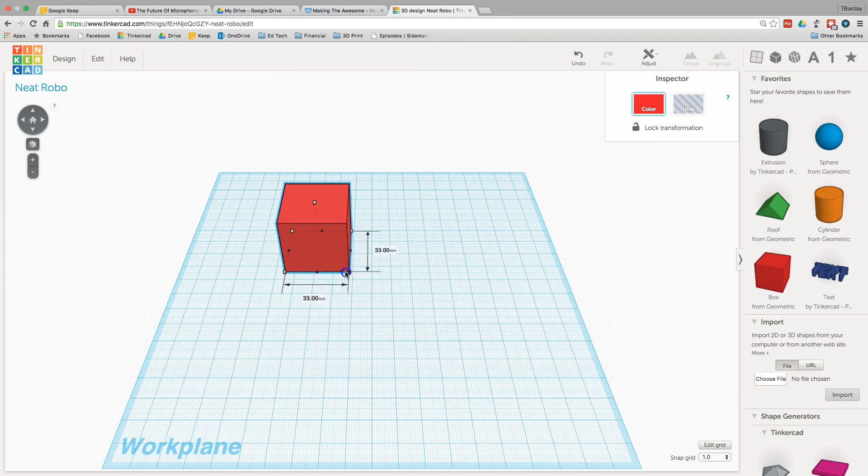To resize this box, we use a number of handles, the white or black squares around the box. If we grab one of the corners, we can resize it in two different dimensions. If we want to keep the box in proportion, we hold down the Shift key and drag it. So that's in proportion, and that's without the Shift key, out of proportion.

If we want to make it taller, we grab the white box on top. This can be confusing with all the other handles, so it can be difficult to find. There's also a black triangle on top, easy to grab by mistake, but that will actually move this off of the platform.

I'm going to rotate this a little bit so you can see that. You can move the vertical axis, moving the whole piece using this black arrow.

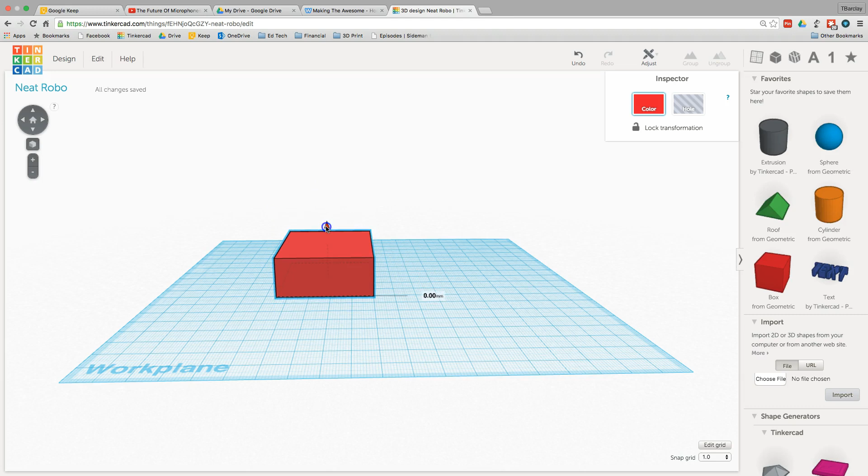There are three more handles which are sometimes a little more difficult to see, the curved handles around the corners. If you grab one of these, you can rotate it. If I move the mouse inside this little blue circle, I'll rotate in chunks; if I move it outside, I'll rotate in individual degrees. So depending on what you want to do, you'll want to know where your mouse cursor is.

There are three of these handles, and on this view we can only see a couple. To see our object from another view, we'll click somewhere in the background with the right mouse button and rotate. Now we can change our view of the whole work plane, and you can see all three of these handles.

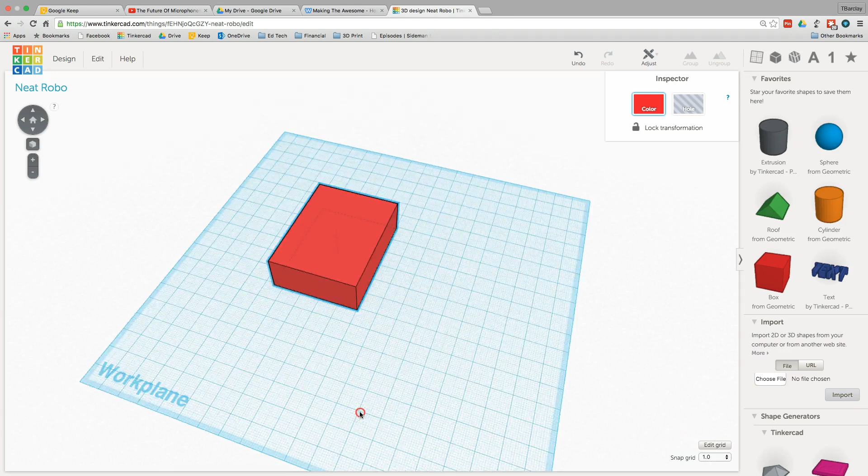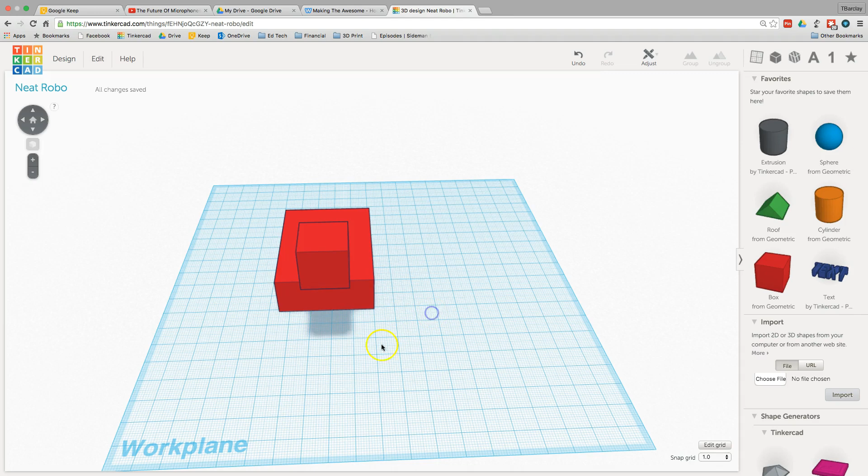Changing your view like this is one of the most critical things you can get the hang of doing. It takes a bit of getting used to navigating in 3 dimensions. The most common error I see when people bring me designs to print is they have two pieces that look attached from one view, but when you move to another view, they're very far apart. So you want to be in the habit of getting views from all over your screen all the time.

You can also zoom in on what you've created, or zoom out, using the mouse wheel. You can also use the trackpad for all of these things, though it's a little more difficult. I highly recommend a mouse, but it can be done.

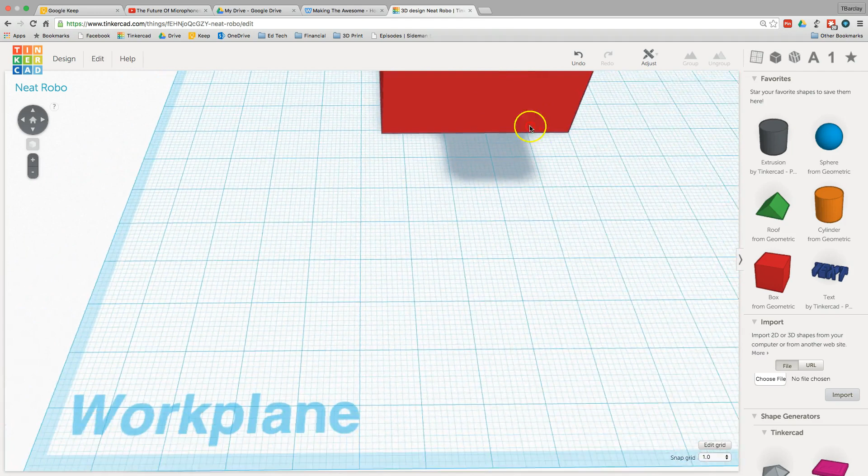If you hold down the Shift key while you right-click, you can move the work plane around. This is particularly handy when you're really zoomed in on something. If I'm seeing one corner and want to come over to see the other corner, this is a lot easier than zooming out, changing your view, and then trying to zoom back in.

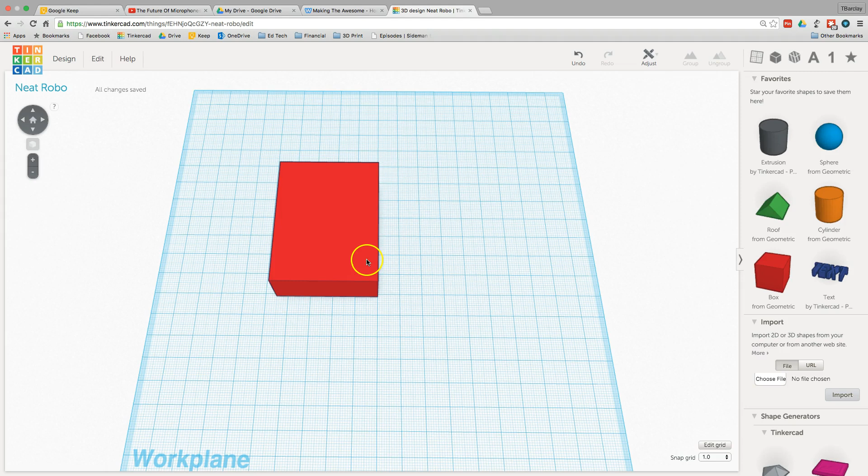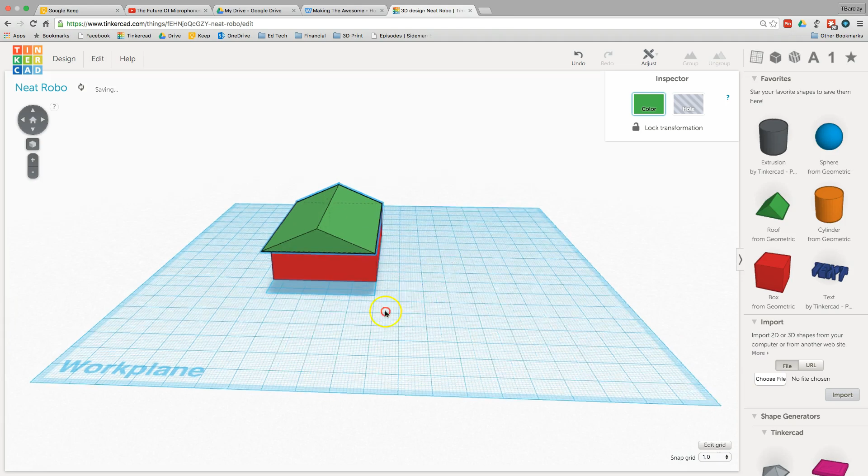Alright, so we've got a piece here, and if I want to add another piece to it, let's say this is a house plan and I'm going to make a roof. So I grab a roof piece and resize it to something similar.

So I have these pieces together, and I want to group them so I can treat them as one piece from now on. I can select both pieces either by dragging a square around both, or by clicking one piece, holding Shift, and clicking another. Once I've got all the pieces I want to group selected, I go up to Group in the top right corner, click it, and now they're grouped.

You'll notice the color changes as well. When you group something, it takes one of those colors and makes everything that color, to let you know. You can change that if you want to keep the colors by clicking your color indicator here. You can change the color of everything, or if you click the checkbox for multicolor, it will keep the original colors even after you group them.

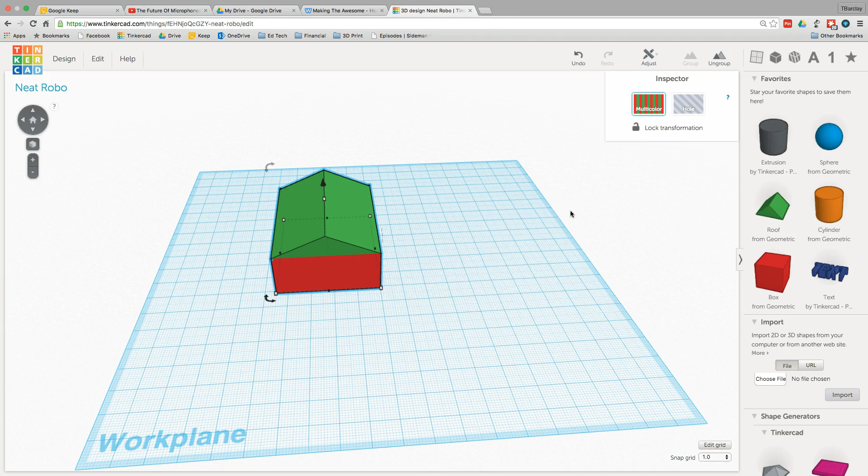If you 3D print this later, this won't affect the color it prints in, but it can be really handy for keeping track of what's what. There's another button right next to the colors called Hole, which we use to subtract a shape.

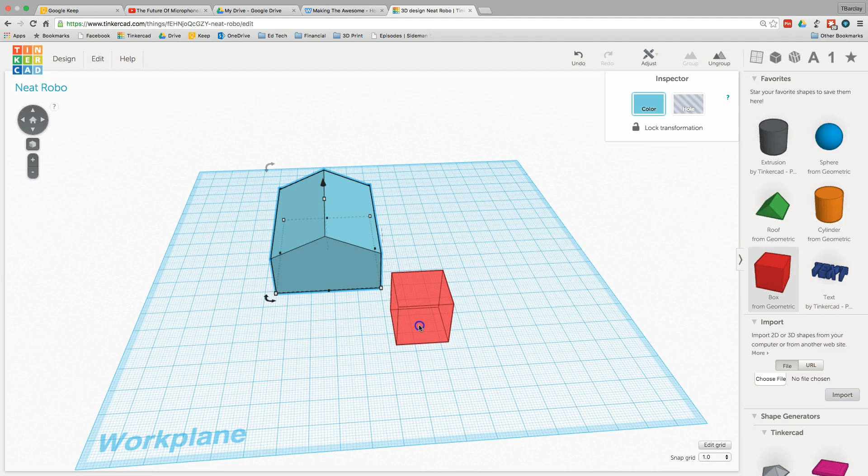Let's say I've got this house and I want to cut a door into it. So I'll bring in a shape and make it roughly door shaped.

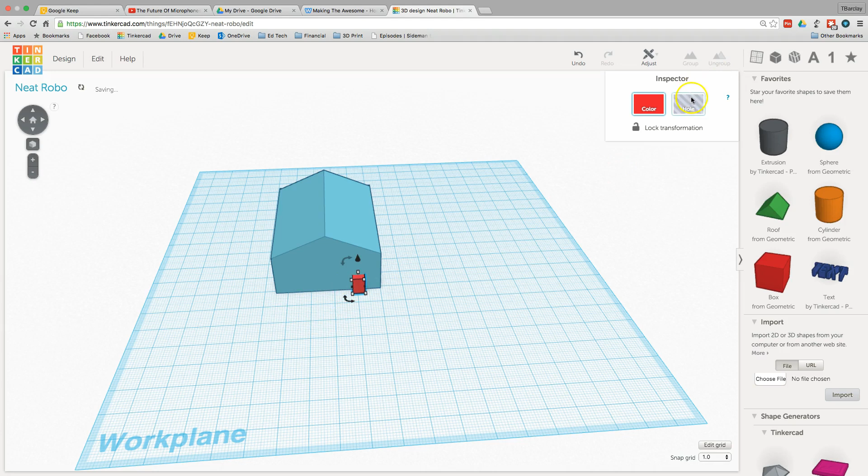If I want to remove this shape from the larger shape, I put this wherever I want it to be. I make it a hole with this button in the top right, which turns it transparent. Now it's not actually going to cut anything yet. Before it cuts that piece out, I have to group these pieces together. Once I select everything and hit group, now I have that piece cut out.

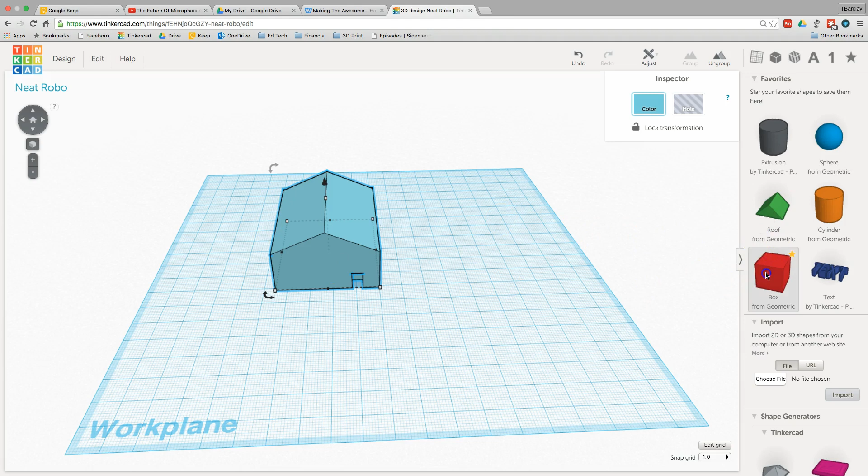This is a really powerful way of doing things. So for example, let's get rid of this. Let's say I'm making a little box here, and I would like to round this edge. The way I do this is I make a cutting tool. Let's get another box and change the color to make it a little less confusing.

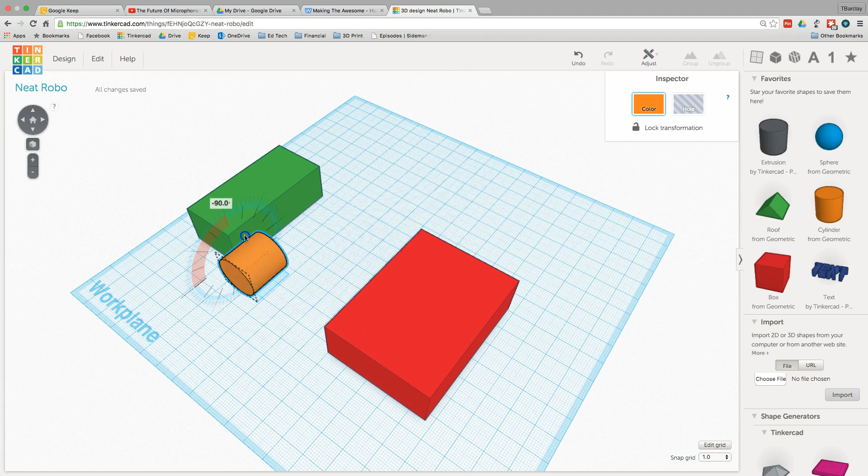And I can cut a shape out of this box that I will want this curve to be. Bear with me for just a second. It's not very difficult to do, but conceptually it's a little bit challenging sometimes. So I'm going to cut the corner that I want out of this box. I'm going to make this cylinder into a hole, group these two together.

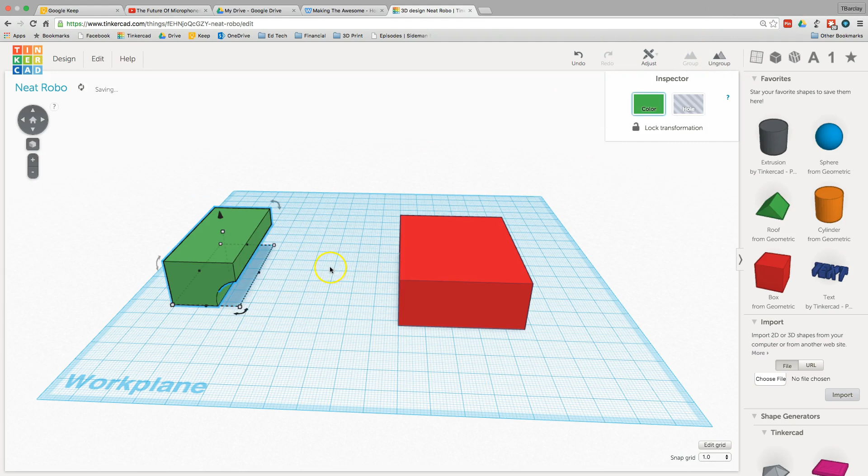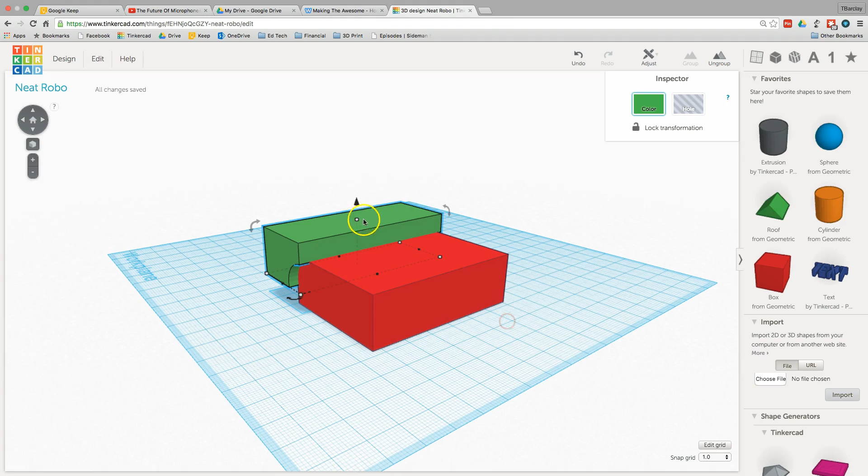And so now I've got what I think of as a cutting tool. I've got the corner that I want in reverse, and I can move it over to here. And I'm going to cut this shape out of this box by making this whole shape that I've created into a hole and then grouping these together. That's pretty well lined up. If I were making a finished product, I might spend a little more time on it. But you can make some really complicated shapes with just these couple tools, the simple shapes, adding and subtracting them.

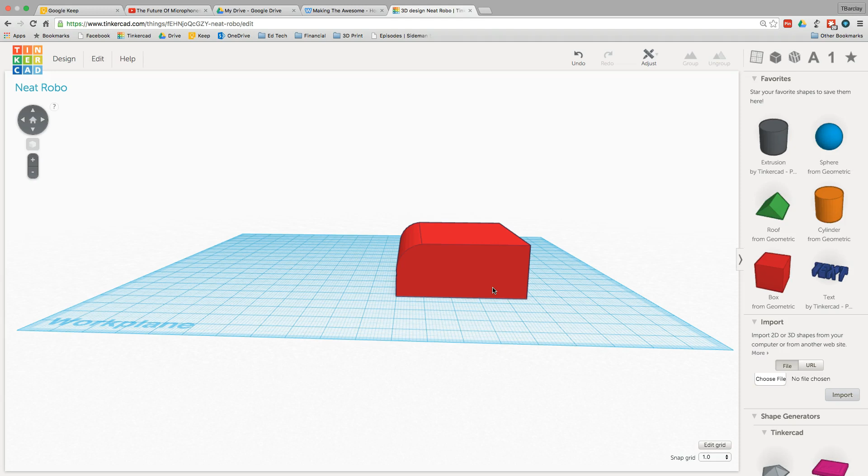There are a couple other tools that Tinkercad has that are really handy, though. One is their text tool. They've got a whole series of tools over here called shape generators. Some of these are made by Tinkercad, some are just made by users who've coded these. But the one I use the most of all is this text tool.

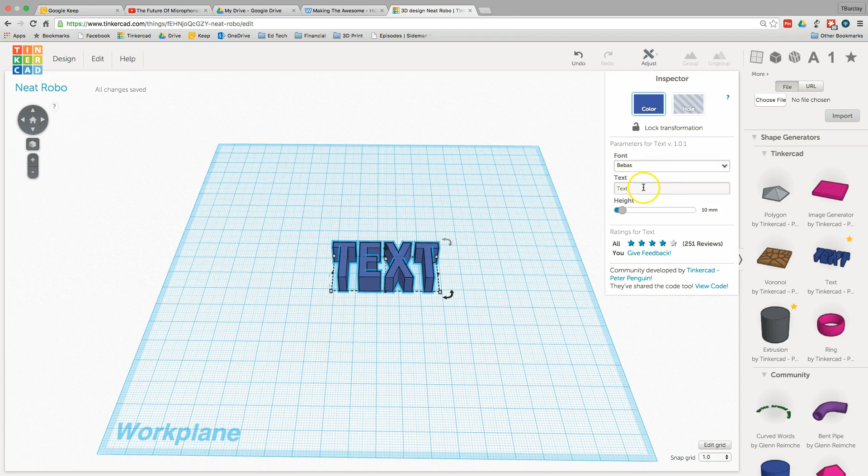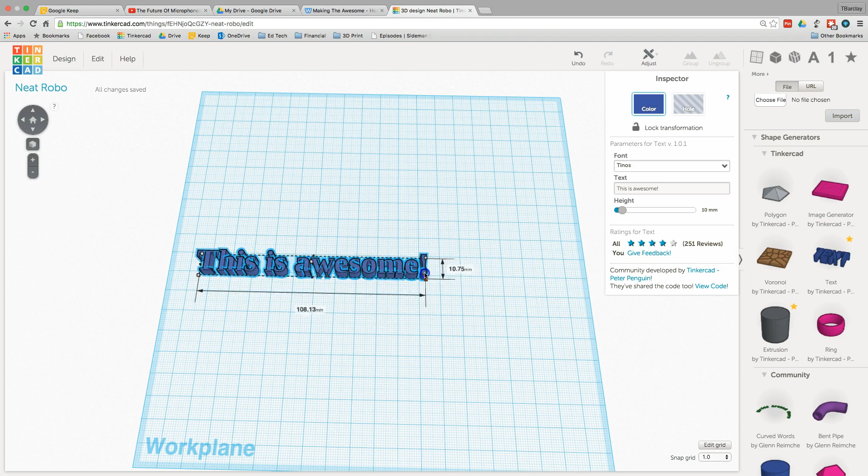Once you drag that into your workspace, you can type in whatever text you want. You can mistype whatever text you would like. Change the font on it if you care to - that's the one I like. And now you've got a shape that you can manipulate just like any of the other shapes. You can make it larger and smaller, you can rotate it, you could rotate it on another axis to make a little plaque out of it. You can cut it out of things. It's a really handy way to work, and definitely better than any other methods on Tinkercad for making text.

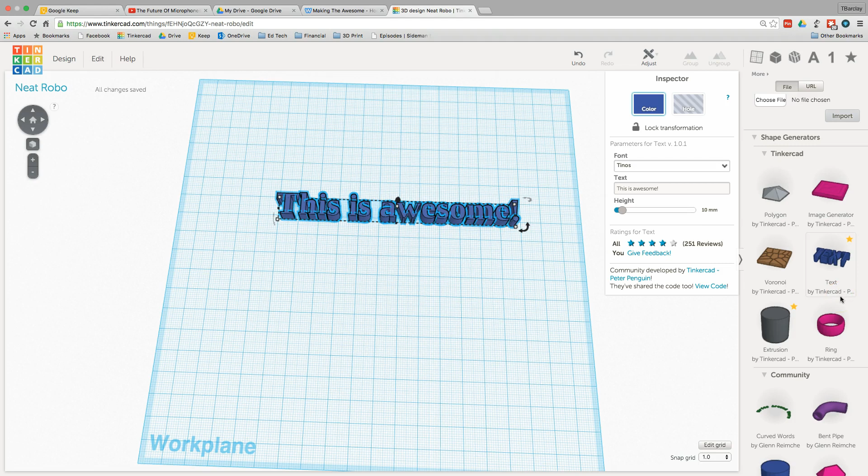There are a whole bunch of different shape generators that Tinkercad has. So here's a bent pipe, and on this bent pipe you can see a whole lot of parameters you can set. You can set the outside pipe shape, the inside hole shape, the width of the walls, and all kinds of things. It's really useful. Sometimes it's a little difficult to find just the tool you need, but there are an awful lot of tools there, so it's worth taking a look at.

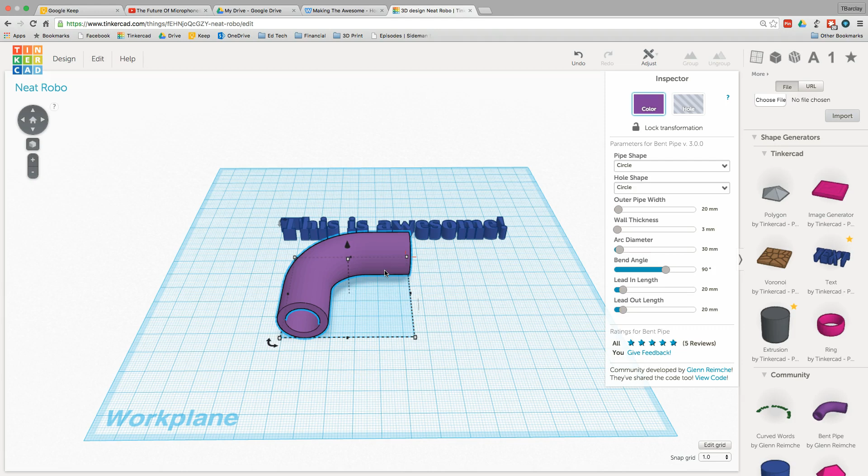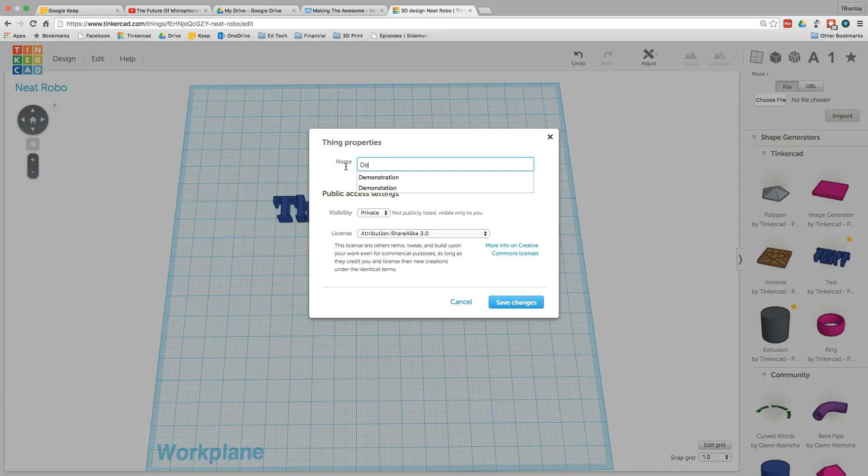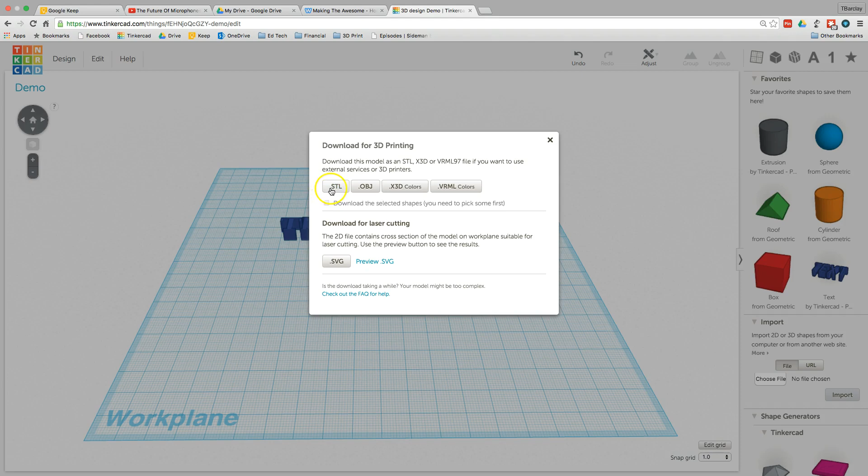If you want to send it to somebody to print, you click Design and Download for 3D printing. Now the thing to remember in Tinkercad, what you're usually going to want is this first option, STL. So if you can just remember that it's the very first option, you'll probably be all right. And when you click this button, you'll get a notification that a file is downloading. It'll download straight into your Downloads folder, and then you can just take that file to whoever's got the printer. You can email it or whatever. The files are very small.

Alright, so those are most of the Tinkercad basics. There's a lot more to the program, but this is enough to get you started. And I really recommend getting in and just playing. Try to find shapes that you can put together just by combining simple shapes. A snowman's good, a little toy car, those kinds of things. But spend a little bit of time playing, and I think you'll find it's a lot of fun. Thanks a lot.